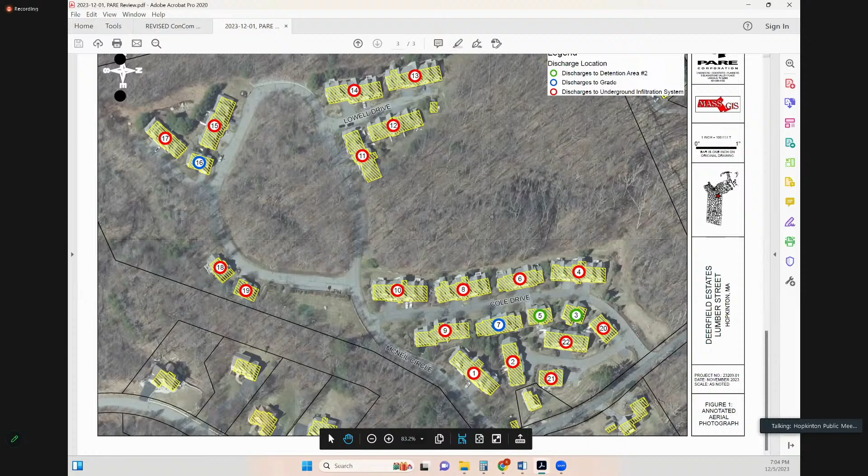Capital Group Properties, Deerfield Estates off Lumber Street - request for certificate of compliance continuation. Kim, if I remember correctly, this project we've been looking at for a while, and where we left off was to ask the peer review consultant to take a look at the stormwater report and confirm what was required for infiltration on this project. Do you want to give an overview of where we're at?

Yeah, I can attempt a quick summary of PARE's findings. They were looking for whether the subsurface infiltration chambers were included in the design to meet standards 2 and 3 under the stormwater checklist, which is peak rate attenuation and recharge requirements. What they found is that minimum standard 2 is met without the units being connected, essentially. They did find that for standard 3, the analysis provided by the applicant required that 63,995 square feet of roof runoff area would need to be connected to infiltration systems for compliance with that standard, the standard for recharge requirements.

The order of conditions that was issued does include special condition number 70, which requires drainage from the roof of each building to be directed to dry wells or infiltration chambers for the purpose of groundwater recharge on the site. It appears the commission at the time was concerned about groundwater recharge because of adjacent vernal pools at this property, and there is a well as part of this development. So the commission had that concern at the time.

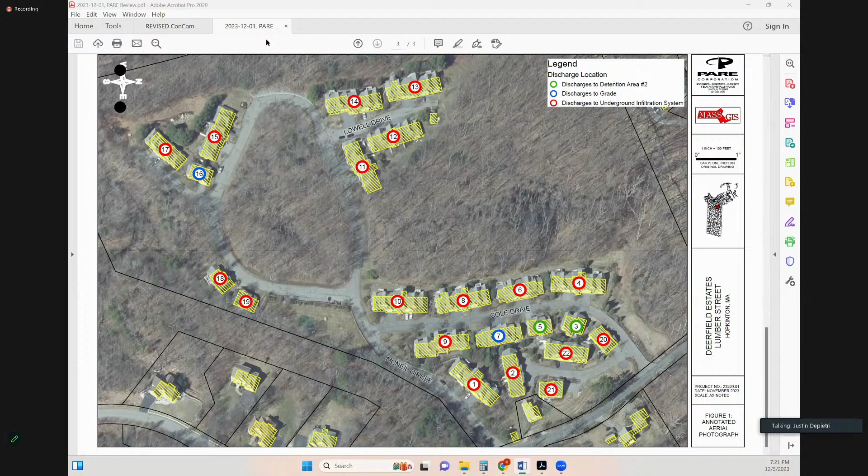Can I ask one more question? We've done a lot of stuff over the last couple of months trying to get this signed off. So I want to be clear, if we have an engineering firm come out and verify that we're meeting these standards on these units, there's not going to be a whole lot more that needs to be done.

Verifying the standards are met on the units and providing an as-built, that's what would close it out. Okay. All right. Thank you.

The Hopkinton Conservation Commission will hold a public hearing on Tuesday, December 5th, 2023 at 7 p.m. virtually online to hear all persons interested in an amended notice of intent filed by Robin Vacha to replace existing retaining walls, location 29 Woody Island Road, Assessor's Map L36, Block 14, Lot 0. This application is subject to the Wetlands Protection Act, Chapter 131, Section 40 as amended of the general laws of Massachusetts and the Wetlands Protection Bylaw of the town of Hopkinton. This legal notice is also posted on the Massachusetts Newspaper Publishers Association website.

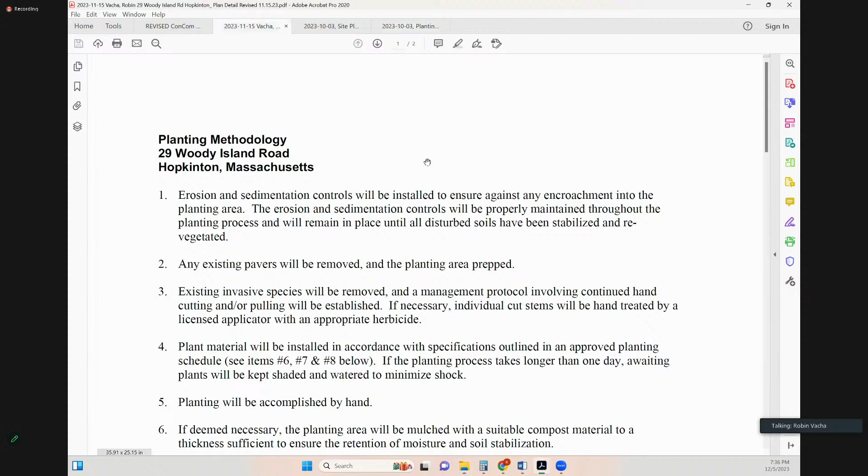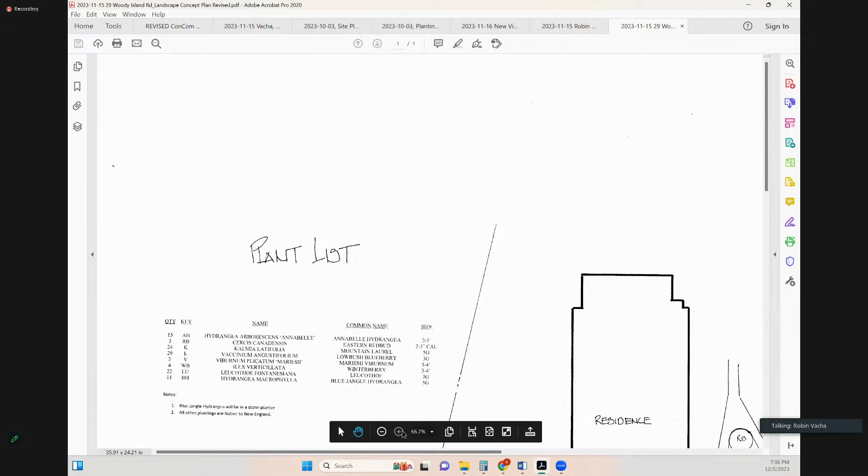Kim, do you have the planting document that Doug gave? No. They're all, I mean, again, we don't plan to change, but they're all clearly defined. He has - I don't know if you have it or not. I think he gave it to Kim. We have a whole, I remember the ones you - there it is, no, there you go. There it is. So you can actually see the plant list up there.

So it looks like there's 15 hybrid hydrangeas, a hybrid viburnum - 3 of those - and then 11 other blue jangle hydrangea hybrids. And then I found this one was actually a non-native - there's 22 of them, it was not native according to Go Botany.

I think Leucothoe is a native New England plant. Might not be that variety, but I think it is though. At least people ask us for it at the nursery, and we do supply that, and that is a native New England Leucothoe. It grows in the woods naturally around here.

The blue jangle hydrangea is not. I put that because it's a very low growing blue hydrangea, and it's going to be planted only in the planter above the patio very close to the house. That's a contained planter, only because I didn't want to obstruct the view inside the house, so I needed something that would stay low in flower for the summer. So I did do that, and I knew that it wasn't part of the list.

Now, the Annabelle hydrangeas, I believe they are native New England. If they're not on the list, they're going to be on the list. That's a native New England plant. Sometimes it takes a while for things to click in. I'm working all over the state, and they tend to accept it, and it's not yet. We have arguments about it.

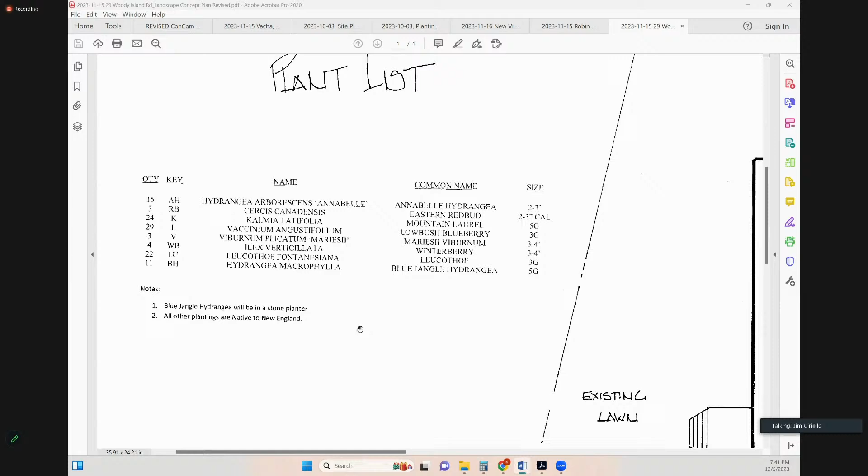So Melissa, yes, our two concerns would be that something not be invasive and that something be hardy and survive. These fit that, right? But we don't know them as invasives, and they're presumably appropriate for our zone, and they've been successful in other places. So that's why I say I'm okay with it, but that's just me.

Seems that way to me too, Jim. I'd say with the way climate's changing too, I wonder what southern plants are going to become more native. Oh stop it, so we'll be planting palm trees and pineapples here someday. Long after, not I'm going that far. But yeah, I think the survivability and not having to water them, using a lot of water obviously wasn't a problem this summer, but that's a good point too.

Other years we don't want high intense water use plants. But that being said, the hybrids, I think they would have a lot of the characteristics of the natives if they're hybrid. They'd probably inherit those, and that's why they're sold up here. So I think I'm okay. There's a lot of plants, and I appreciate the number of plantings. I think it could give a little flexibility there, in my opinion.

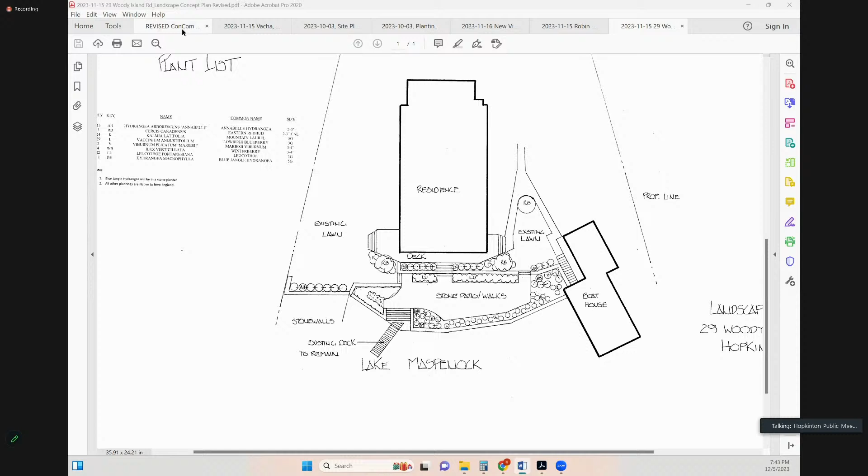Okay, are there any questions or comments from the audience? Or from the public, I guess I should say. I don't see any hands. Through the chair, this is Joe.

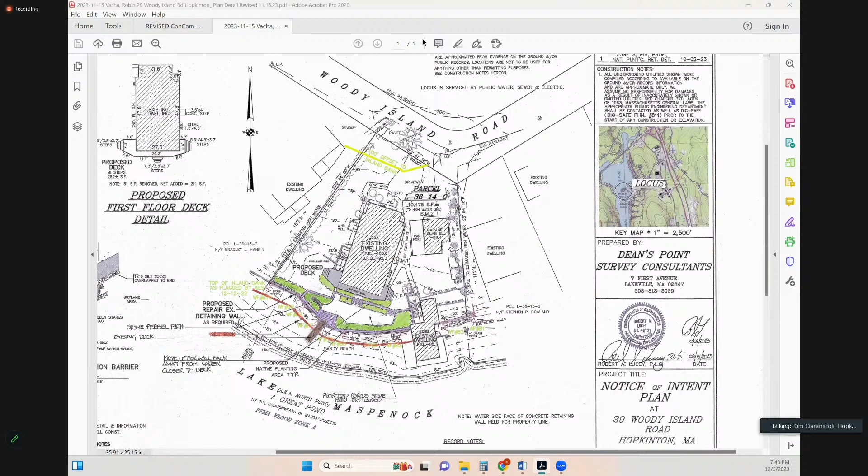Okay, so I think we covered all the bases here. So what we are asking for before we vote would be making the changes in regards to swapping out the straw wattles for filter mitt or something similar. And then applying some sort of stabilizer to the open soils over the winter, whether that's a blanket or straw or something to that effect.

And then, do we have a condition? This is going to be done during dry or during drawdown, the work on the wall, correct? That could be a condition. And it's on the applicant should verify compliance with the Mass Waterways Chapter 91 program and permit requirements for the wall itself. Okay.

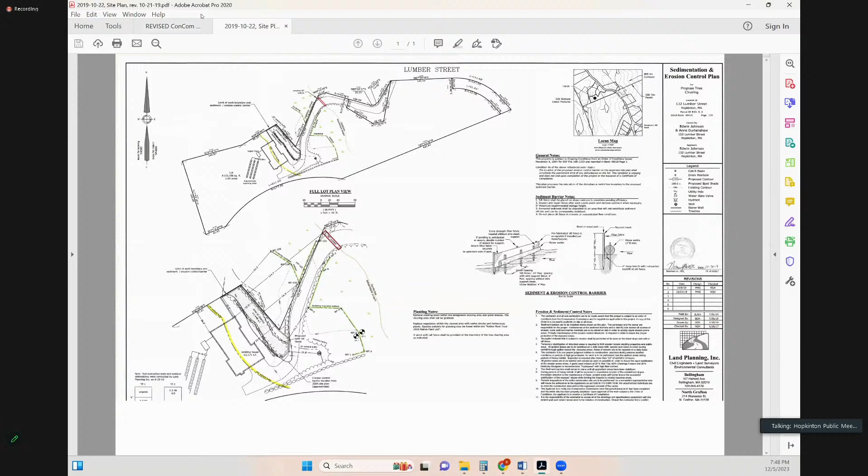All right, so our next two hearings on the agenda were continued to December 19th. All right, so that leaves the work session items.

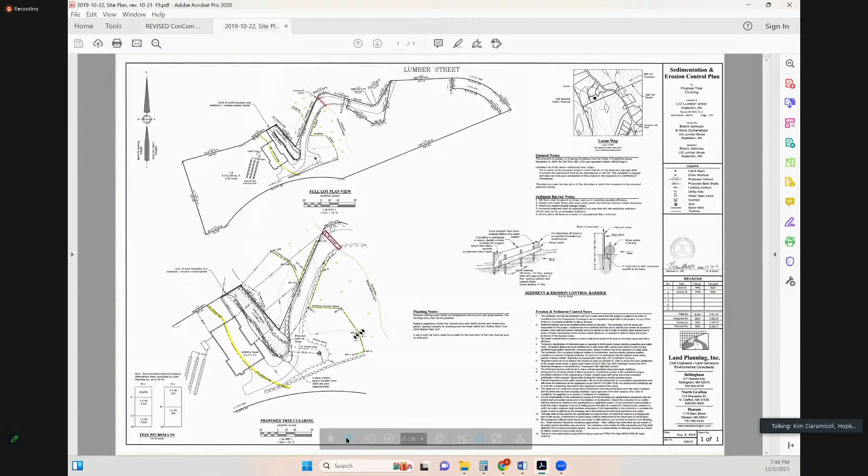So we'll go with Johnson, 132 Lumber Street, request for a 1 year extension. Yeah, I can run us through this one, hopefully quickly.

Here are some site plans to look at. So this is a request for a 1 year extension. There was a 2019 order of conditions for removal of vegetation within the buffer zone. The applicant removed the permitted vegetation and has allowed the cleared area to revegetate naturally. And I went out and inspected the area in October.

We did find that the area is stable, but does have some invasive species present. I recommended that before the applicant apply for the COC, the invasives be managed, and we do another inspection to evaluate the health of the vegetation. Because of the timing of the year, a one year extension of the permit is necessary in order to finish the work. So that's what I'm recommending to the commission tonight. And I will work with the homeowner in the spring to manage the invasive species. Luckily, I think it's just a hand pulling situation, so hopefully we can get the COC going early in the spring.

Okay, seems reasonable, makes sense to me. Does anyone have any questions, comments on this? No. Nope. Okay.

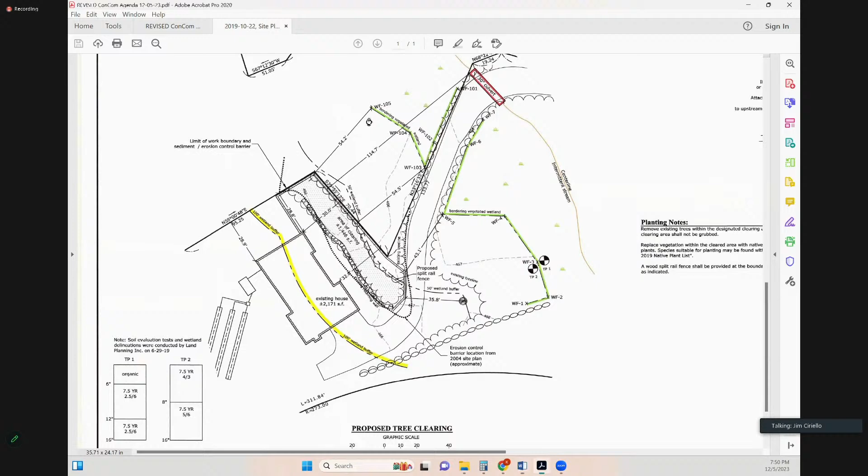Do we need to sign on this too, or just make a motion, Kim? Just make a motion. Can I get a motion for a 1 year extension on this 132 Lumber Street project? So moved, Ed so moved. I heard Jim move, I'll second. Jim seconds.

All in favor? Ted, aye. Jim, aye. Ed, aye. And I am an aye. All right, thank you folks. All set there. Next we have a continuance here for Grasshopper Energy.

And then we have 0 Equestrian Drive, or a request from Benny Mac, 21 Appaloosa Circle, to remove down trees and commission-owned open space.

Through the chair, yes, I can run us through this. I was expecting the homeowner on the call tonight. Is anybody in the waiting room, Melissa, or are we clear? I don't see anyone else asking. Is there like a waiting room button?

I have no idea, one would hope it would pop up if there was somebody. I've been seeing them pop up and allowing anyone to come in as they pop up, so I don't see any.

All right, so this is a request by a homeowner. A tree fell down naturally. Mr. Benny Mac lives in this lot here. This is the original subdivision plan, so it's the lot with his house. Behind his house is a Cultec unit leaching area, which accepts drainage runoff from the rest of the subdivision. And then behind that is open space, which is actually owned by Conservation Commission in this case.

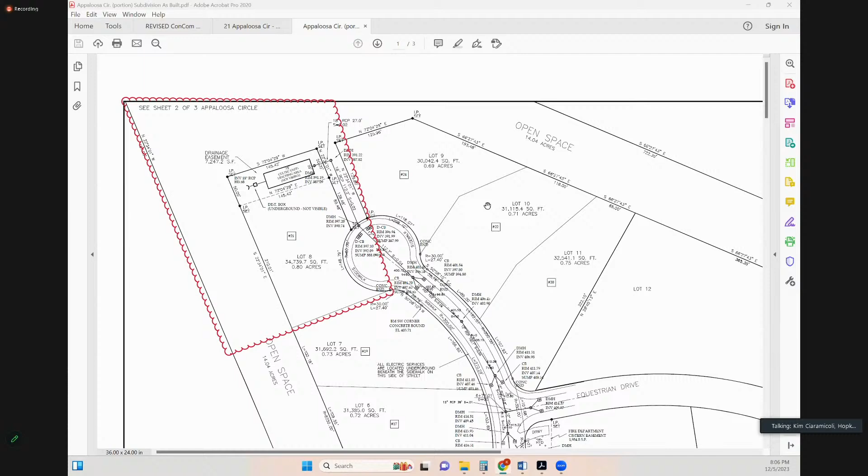Next we have Maspenock Woods LLC, West Elm Street, Maspenock Woods condos, request for certificate of compliance. This is a continuation. What do we have here, Kim?

I actually have not heard from them since the last meeting. I sent an email and didn't hear back. I'm wondering if anybody is on the line, because I didn't get any other updates either. Hi, I'm online, this is Amanda with Guerriere and Halnon. For this item, we're working with the wetland scientist, so we'd like to continue this to the next hearing if possible, and we'll reach out to the wetland scientist and coordinate with Kim. The next meeting is December 19th. That works for now. Okay, thank you.

All right, and next we have Trolio, 100 Ash Street, request for certificate of compliance.

I'm also on for that one as well. You are? Okay.

Can you give an update? Sure. So we submitted the request for certificate of compliance back in October. It's a single family house lot that the applicant has recently purchased. When the application was filed, it was in the process of being transferred between owners, and there was an outstanding order of conditions on the property that needed to be closed out. It's since expired. The old one was from 1996, so it's an old order.

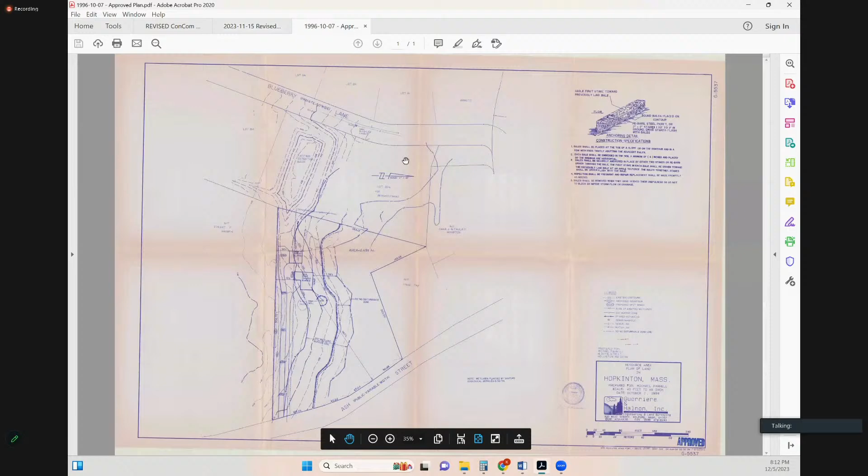Looks like, is this the approved plan, Kim? Yeah, so this is the approved plan. It's an oldie, so not super detailed, but here's the driveway, the wetlands over here, the house, and then the garage. And here's the as-built. So there is this expansion, this foundation, and I think the actual garage footprint is a little bigger as well.

The garage is already built there. It's already up, I'm not sure. Just want to make sure everybody's clear about that.

Can you provide your name and address for the record? Thank you. Oh, this is Marcello, the homeowner. Okay, I just want to make it clear that the garage is already built. It's already, except for the roof structure, everything is already there. So before I bought the house.

And that's all. So even on the approved plan, Kim, was that within the disturbed area and grading? Yeah, yeah.

I would say the additional foundation was within the area that was already being graded and maintained as a lawn. I don't know at what point in time that took place. I think this property was overgrown for a while, so I don't think anybody had seen it in a long time.

I'm just filing a permit to put the roof structure back on, just to clarify. I know that probably has nothing to do with what we're talking about, but I want to make that clear as far as the state of things.

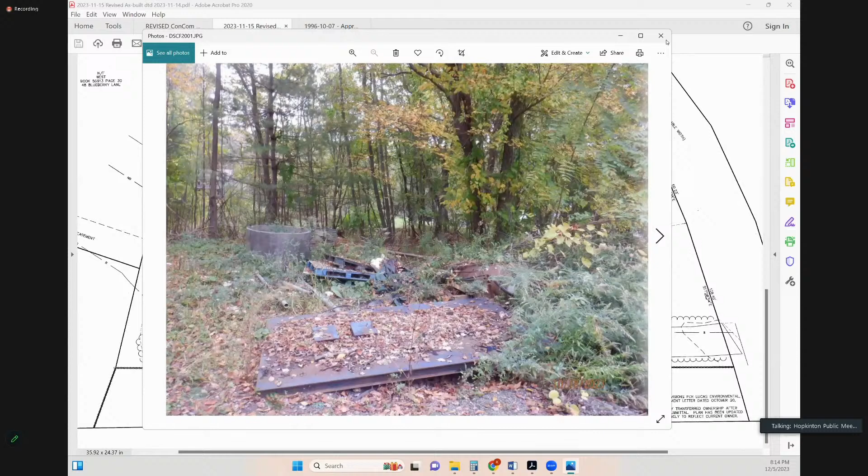Melissa, can I? Yes, go ahead, Jim. I assume the applicant understands that there was an order of conditions, a plan to build a house, and then someone along the way ignored that, and their attorneys ignored the fact that there was this encumbrance, but they ignored it and built anyway. I know you're just here for the roofing, but we have to get over the fact that this was all built without any permit from us.

I'm not sure about what happened in the past. I don't know, I'd have to ask Amanda about that, but yeah, I don't know.

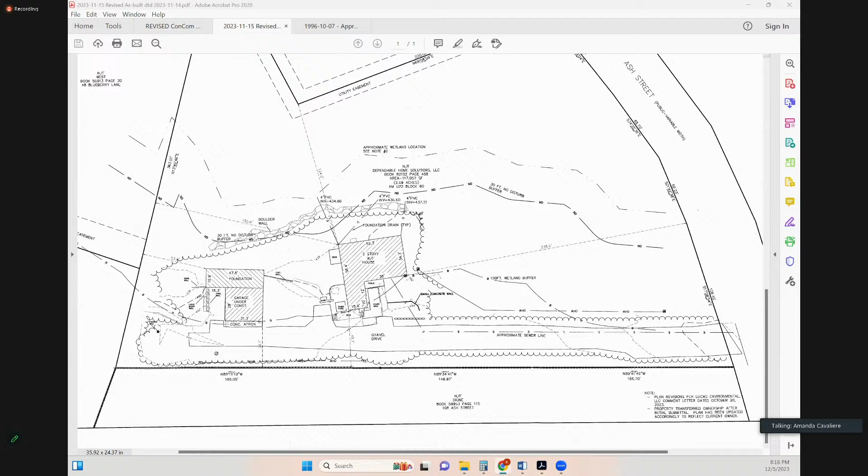If I may, through the chair: this site was previously constructed. One of the items under the order of conditions to close it out was to provide an as-built of what was constructed. The applicant is aware, and we've had conversations that any future work on this property would require a new filing for any work within the buffer zone if needed. The garage is already partially constructed, so any building permit required to put the roof on has no impact to land disturbance. As far as the foundation in the back...

Again, this was all constructed prior to Marcello owning the property, and as Kim mentioned, it's within the area that was proposed to be disturbed. We can certainly work with the applicant moving forward should they propose additional work on the site, as far as a new notice of intent being filed. But at this point there's no further disturbance. A lot of the time with expired orders of conditions and transfers of property, we provide an as-built showing the commission what is here, so that future disturbance beyond what's on the property, rather than encumbering the applicant who currently owns the property and wasn't part of the previous disturbance, they wouldn't necessarily be responsible for filing for an order on work already done, but anything moving forward would need to be in substantial compliance with what was proposed, minus the foundation.

I'm not sure what you mean by 'minus the foundation.' The foundation is the part I don't understand.

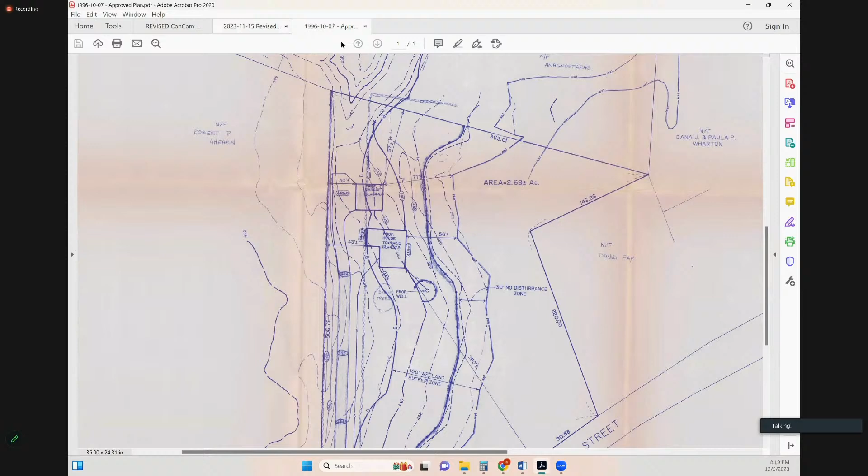Melissa, could I bring up one other thing that Ellie mentioned? Sure. About the roof drains into or near the wetland. Was that originally approved, or is that something added that you're hoping we'll approve now? I don't feel like that's our normal practice these days. Maybe it was whenever these old blueprints were approved. It does not appear that they were proposed.

Again, this is prior to my time and what was constructed prior to the current owner. So the purpose of filing on an expired order would really be to show the current conditions as they exist today with the current owner, and any further work done on the property within the buffer zone would require a filing.

So it looks like these are foundation drains, which are a little different than roof drains. Do the roof drains for the house and the garage go to the surface, like just splash to the ground surface? I believe there's one foundation drain and the other two... actually, they all appear to be foundation drains.

I'm sorry, maybe I don't understand. I think the comment I see in your response is the pipes in the field are roof drains. So they... yeah, those must be the roof drains, if I remember correctly, when the engineer went out to the site to inspect. So those would be the roof drains.

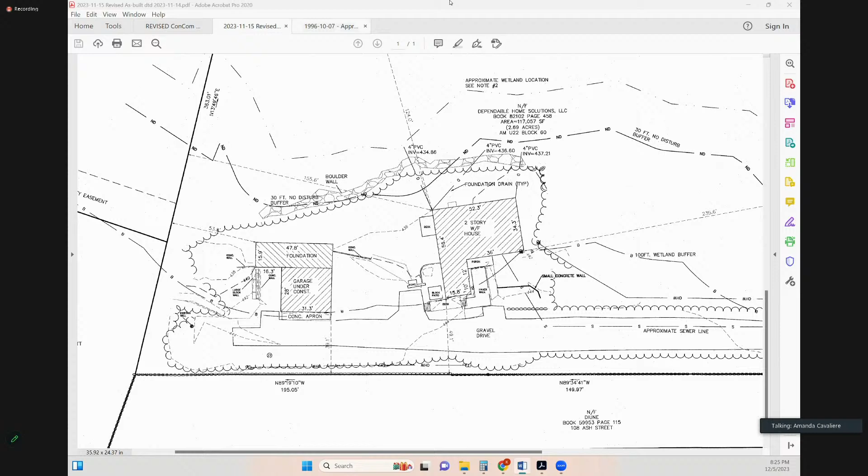All right, next we have DeLeo, 44 Stony Brook Road, request for certificate of compliance. Do we have anyone on the call for this property? Yes, Dave Marquedant, for Paul DeLeo. Hey Dave. Hi, how are you?

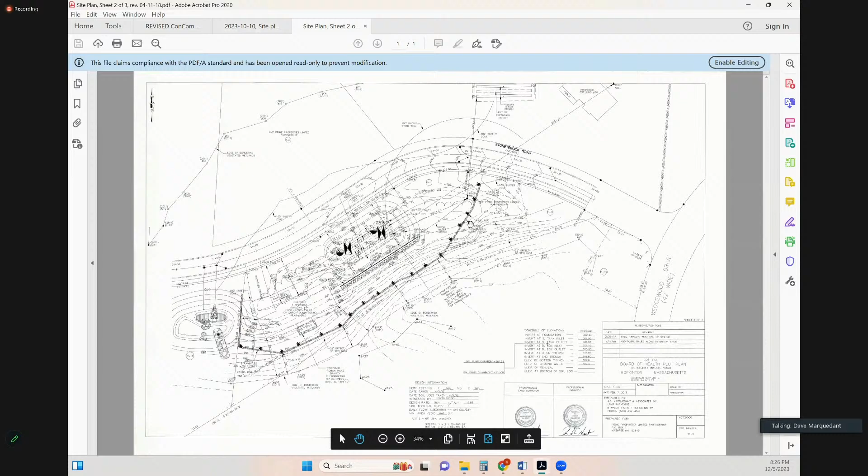Good. So this property was permitted back in '18 by Prime Properties. Paul DeLeo bought it from Prime. I think this board and staff has seen a lot of project changes in discussions with this project from its original design. As it currently sits, the house is where it's supposed to be per project change. Septic and well are very close to where they're supposed to be.

The retaining wall behind the septic has been shown just a little bit towards the road right there. That retaining wall has been shown up in different locations over the last couple of years. It's where it's supposed to be. And then I think this board saw a project change from the septic tank and pump chamber that was in the front yard, which was moved to the backyard.

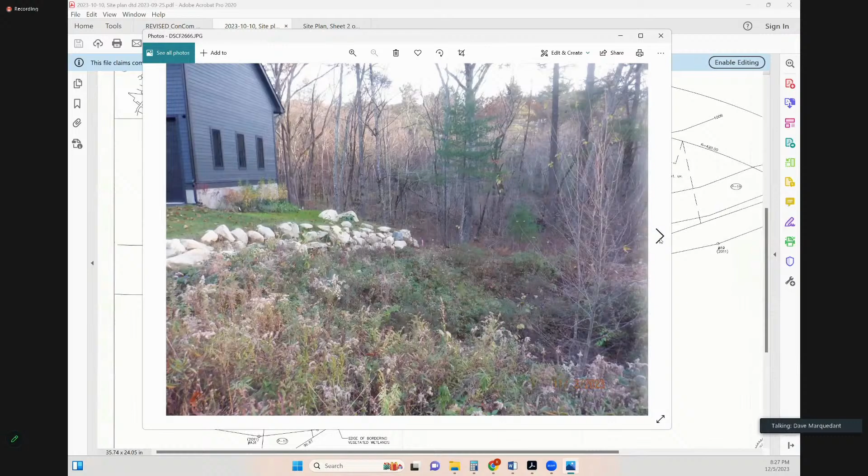There were plantings, patios, chain link fences behind the home, small retaining walls behind the home, and a riprap slope that's acting as our PIB in the back of the property adjacent to the wetlands. Everything appears to be very stable. Everything's green, plantings, trees.

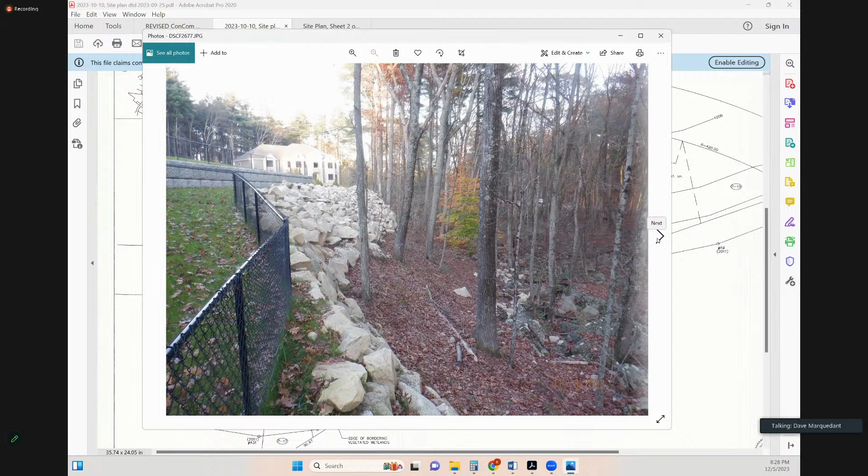Erosion control measures have been removed. You can see the plantings in lawn. There's the limit of work, there's the PIB, and the riprap slope—very large stones that appear to be locked in place and not moving. The limit of work is all more than 25 feet from the wetland, except for one little spot at about 24 and a half. But all else is fine.

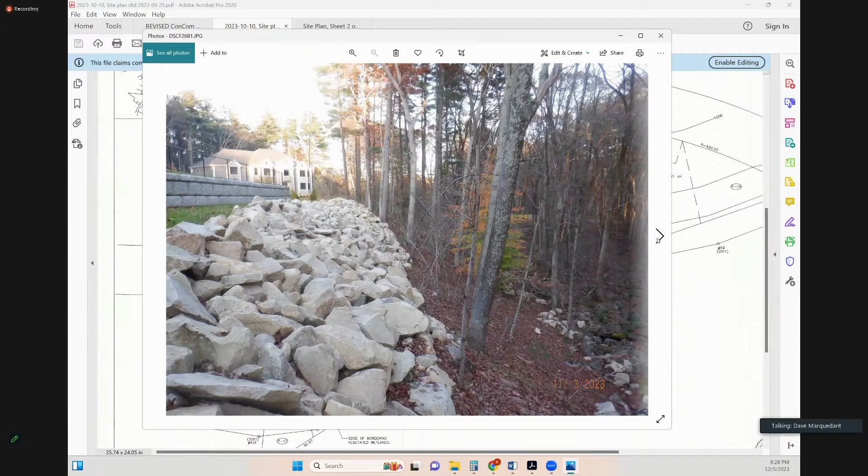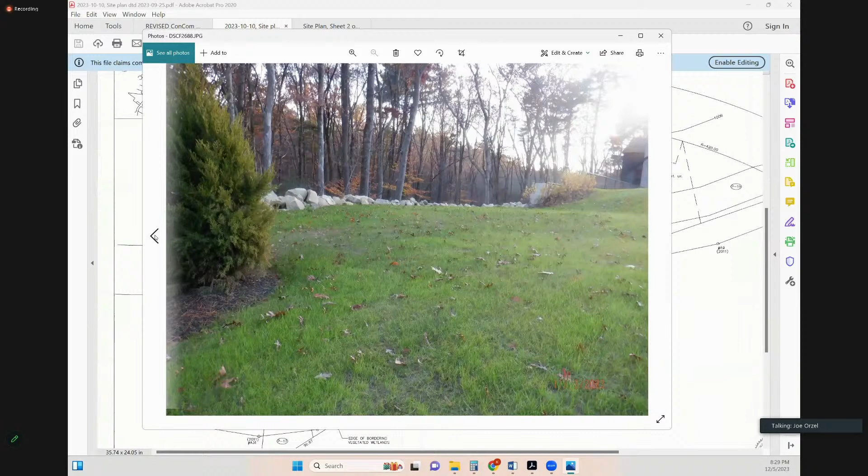Thank you. Joe, Kim, do you have any comments on this request? Yeah, I did go out on the site and I'm pretty much in agreement with what was just said. The site is generally well stabilized. A few areas had some thin grass, but it's coming in well. The erosion control barrier had been removed, and no erosion issues were noted. Other than the rock slope being slightly beyond the approved limit of work, as was stated, no other disturbance was noted beyond the limit of work.

And again, the rock riprap wall does function as a PIB. One question I had was that the most current approved plan I had seen in the file included a small area labeled as a stone lined slope, referencing the detail. However, the detail included on the plan showed a vertical block wall. I'm not sure what was discussed at some of those previous project change meetings, but I thought the commission might want to discuss whether the constructed rock boulder slope was consistent with what was previously approved, as far as if it was in fact a vertical block wall. Other than that, that was all I had for comments.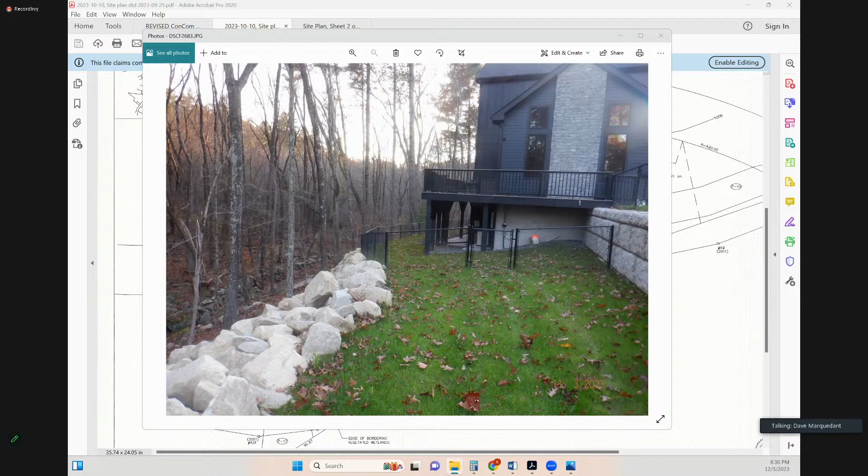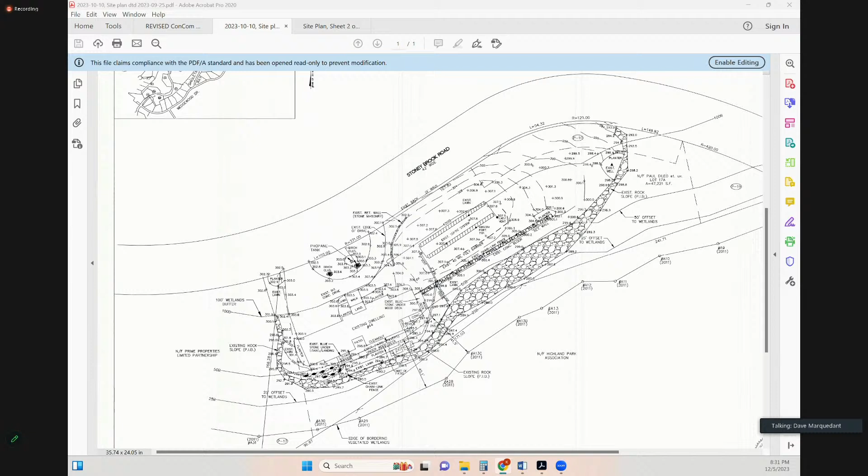Okay, Dave, do you have any clarification on the wall? Yeah, so I think that detail is related to a slope that's right below, between the septic tank and pump chamber and the wetland in the back of the home. There's been a lot of discussion with the Board of Health as to whether you call it a wall or a slope. The Board of Health is comfortable and has signed off on an interlocking slope versus a retaining wall, and that's what was constructed. The detail has always been a little bit of a concern with the Board of Health, that it was shown as such, but that's not what was intended to be built. What they built was what the Board of Health was hoping to have constructed, so the Board of Health was happy with it. There was always a little vagueness as to why it was drawn as a wall in that area. The area we're talking about is right there, right below that spot, between that spot and the wetland, right there.

Okay. Yeah, I think I would defer to the Board of Health on that, with the septic right next to it.

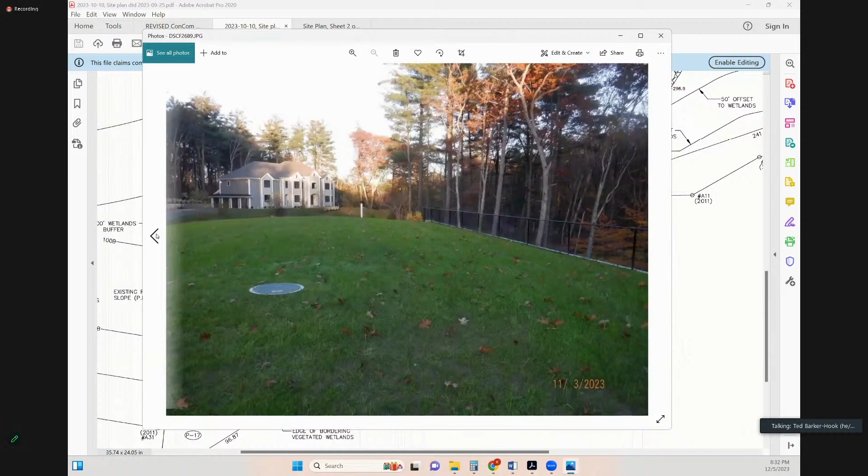Any other comments, questions? I have a quick one. Kim, could you show us that photo that shows the back patio, the riprap wall, and the chain link fence—the one that was up right before you put the plan back up? There. Dave, just out of curiosity, what's the distance between the pylons holding up the deck and the back edge of the chain link? Maybe 10 feet or less? I don't have the piers on there, just a guesstimate, but I have the limit of deck to the fence—deck to fence is 10 feet. And then if we look at that rock wall to the riprap, that might be 20, 25 feet.

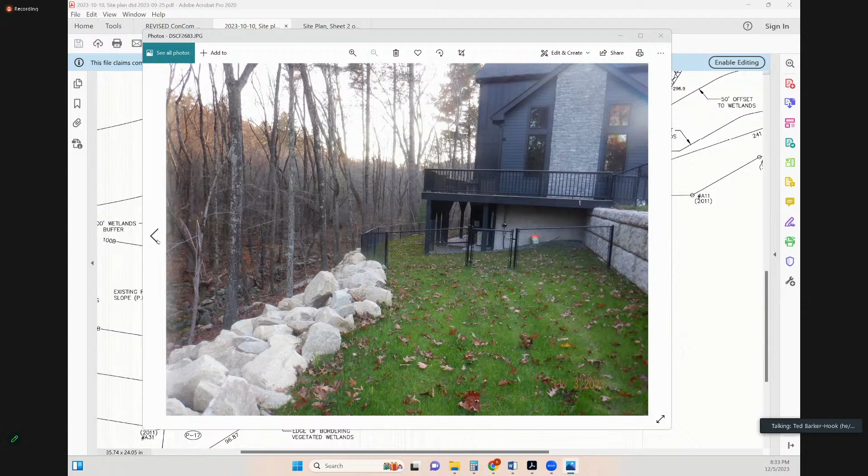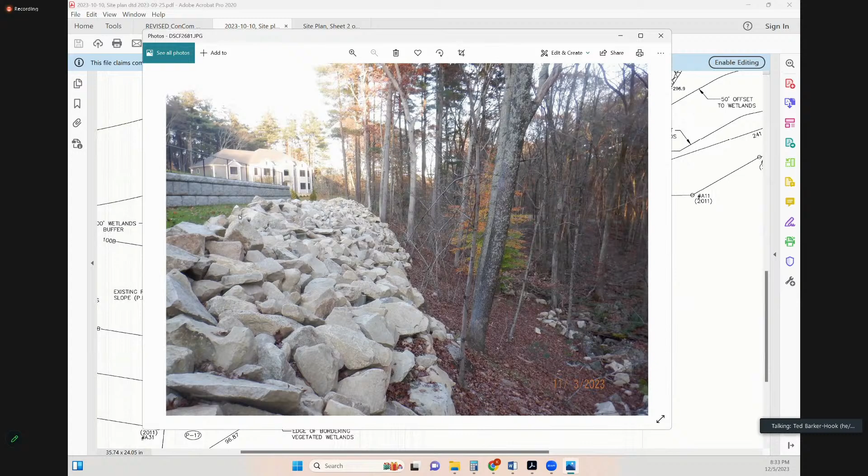I bring this up not for this property, but just for commission members to keep in mind when we have developments asking for 40 or 50 foot backyards so the home can fairly have a backyard. Here's an example where I bet the homeowners are happy, or they wouldn't have bought the home, and we have a backyard much smaller than developers tell us they must have in order to sell their houses and make money. I think this is a really good example of what can be enforced while developers can still make money. It's mostly a comment for commission members to file away, because I often push back on backyard size, and this is the kind of thing that I know gets built and gets sold. So maybe it's a standard we can continue to try to hold developers to. That's my only comment.

Should we create an all-star board? I would put this on the all-star board.

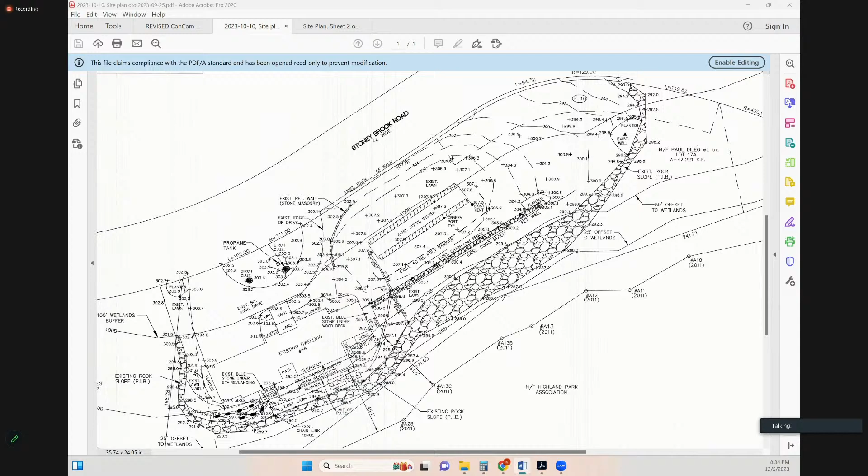Can I get a motion to approve the certificate of compliance for 44 Stoney Brook? Ted will make that motion for the all-star backyard. Can I get a second? Jim will second it. All right, and I'll say something after we vote. All in favor, Ted? Ted is an aye. Jim? Aye. Ed? Aye. And I am an aye.

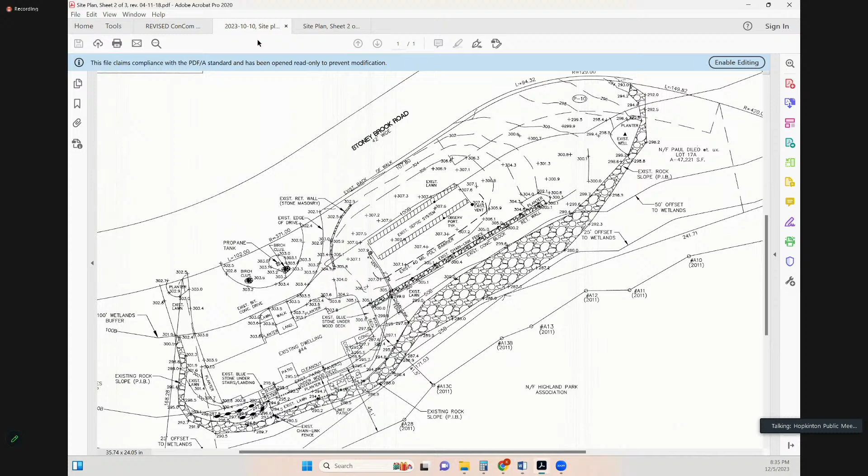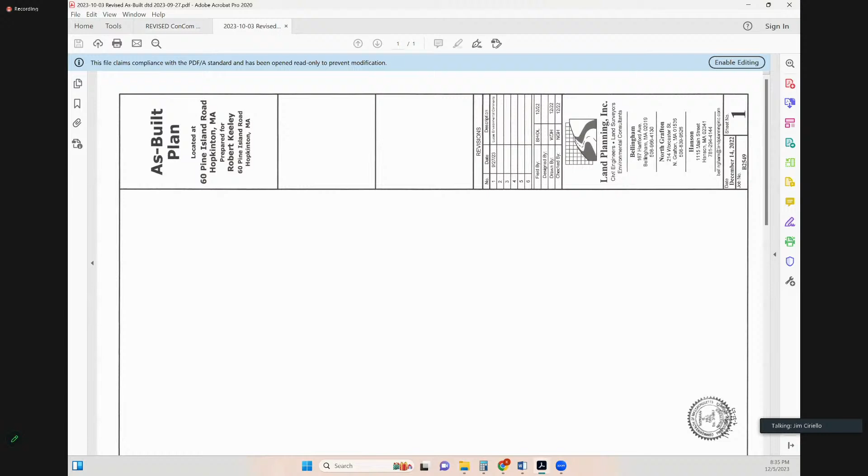All right, know what I was going to say? Yes, I do. Excellent. I'm all for the idea of an all-star board. I love that idea, but I also think we ought to have the flip side of it, which is the oldest applicant requesting a COC. The last one we heard was 1996, I think, right? So I don't know if that sets the record, if we've seen any before then, but let's have the all-star board and let's also put up the longest period of time before somebody asks for a COC. Through the chair, somebody was asking me about file number 11 last week, so they may get beat pretty soon. Wow, well at least 1 through 10 are done. Maybe.

All right, number 10. Speaking of number 10, now I have Keeley, 60 Pine Island Road, request for certificate of compliance. Do we have anyone on the call for this property? Yes, Bob Keeley. Mr. Keeley, can you welcome? Can you give a little overview of your project?

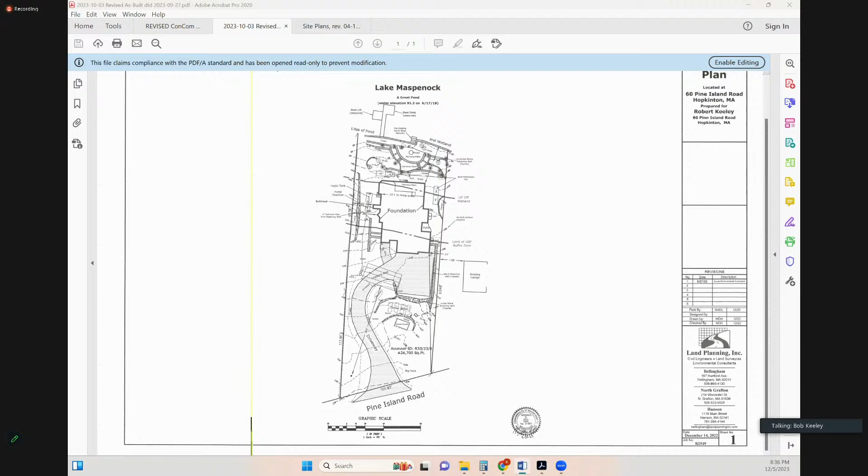Sure, so we bought the property in 2019. There was, you can see on the left, a cabin that was built circa 1900 on the site, and we removed it and built a new house. We had to relocate the well, it's not in the wetland area. There was a failed cesspool in the wetland area that we removed and put in a 2-tank septic system and pumps to pump the water up the hill to leach under the driveway. It was very, very steep. The runoff was going straight from the street down the old driveway you can see on the left into the lake, and we've terraced and graded it, and we love it.

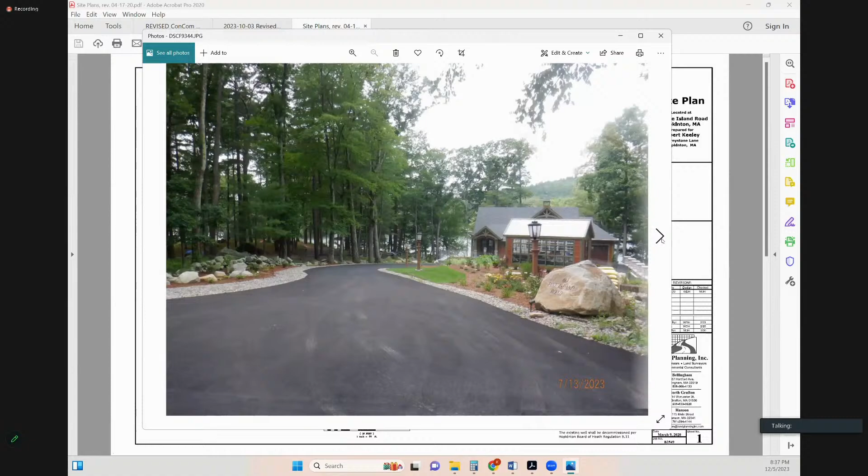All right, so Joe, did you take a look at this property? Yeah, I did.

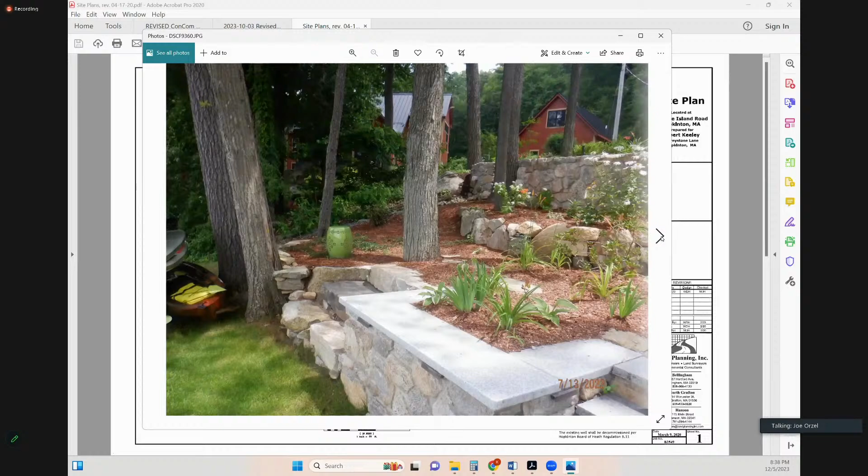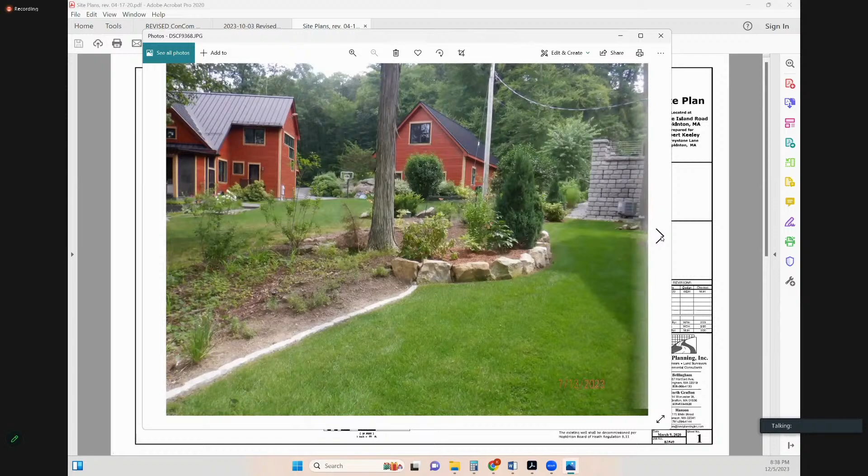So the site is well stabilized. No erosion issues were observed. The erosion control barrier had been removed. One of the pervious patio areas appears to extend closer to the lake than the approved limit of work. In addition, the as-built plan shows apparent steps located from the bank, the retaining wall to the lake, that were not on the approved plan, as well as the fire pit, which is within the pervious patio closest to the lake, which was not on the approved plan.

Also, the approved dock and the boat lift were not included on the as-built. Recommend that those be added. There's also a 4-inch PVC pipe outlet present in the area south of the septic system, and the source of that was not apparent and it's not indicated on the as-built. So recommend that be added and the source be determined.

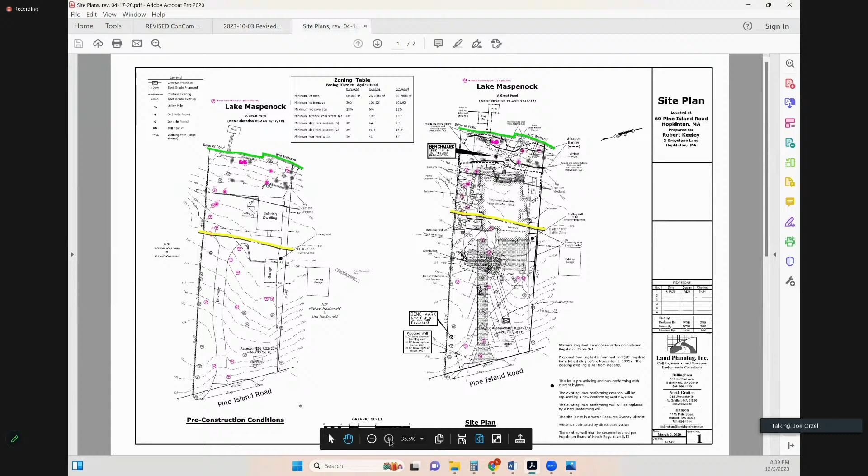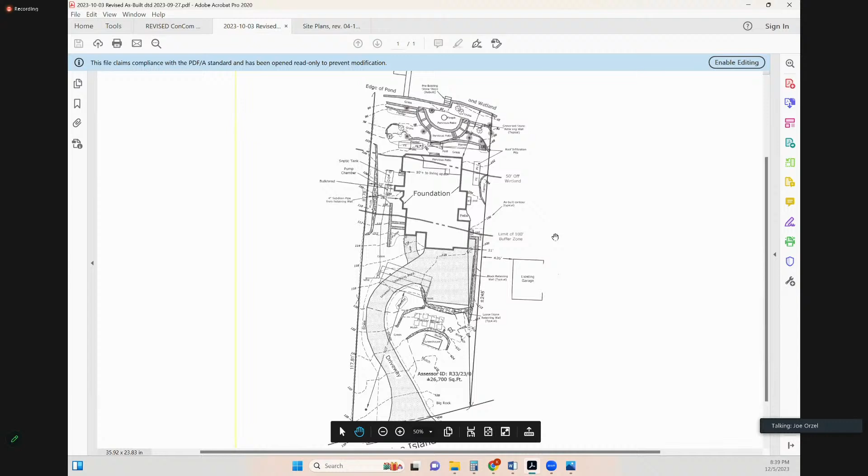The approved plan indicated that the retaining walls were not to be higher than 3.5 feet. There's at least one that is greater than 4 feet in height. Recommend that the applicant provide information that the wall was appropriately approved by an engineer. No PIBs or markers are indicated on the as-built plan; it was not clear if any were required. Just a couple of minor items: the fee calculation form was not included in the materials reviewed. I do note that the Chapter 91 license was obtained for the approved dock and boat lift. And there were a couple of ongoing special conditions as is typical, but that was it for my comments.

Okay. Mr. Keeley, do you have any clarification or comment? Yeah, so I apologize if you don't have it. So land planning submitted back in September responses to LE's observations. That wasn't provided to you guys? I got it, yep. Oh good. Yeah, okay, so I can respond to the items. Is that helpful? I don't, it is just a high level. Yeah, sure.

So the pervious patio, the area when we were constructing the walls was disturbed. Rather than putting grass in, we had to put the same pervious patio that we put up by the house in. It's stable, it manages the erosion, there's no runoff. As far as the, what's the other one?

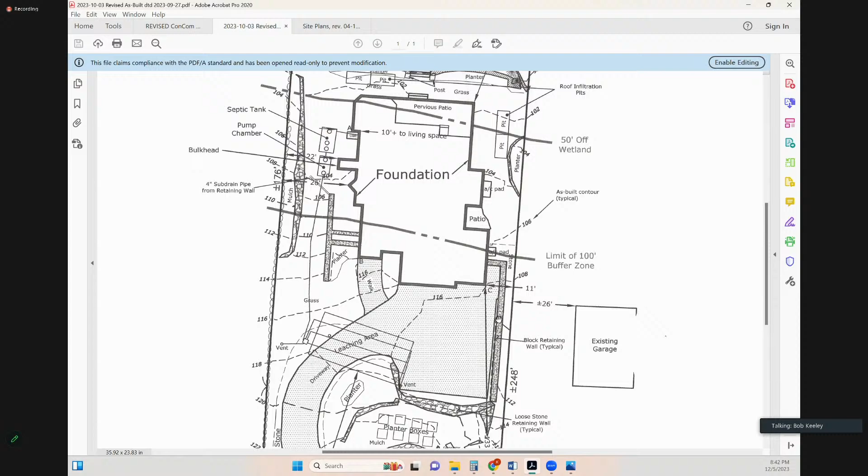When we set the wall height, we didn't know how high the grade was. We were working out the grades after we started the project, and there was no way to get the steps from the lake up to the house without constructing higher walls. Our stonemason says he constructed it per the plan on the site plan. There was what was submitted, a graphic describing how the wall was to be constructed.

We don't have any engineering plans. I wasn't aware I needed to do that. And I think that was all of the items.

Okay, it looks like a lot of them are identified in this plan, the subdrain. I see the dock. Over 4 feet is a building standard for walls, right, Kim? Yeah, so I understand that's the trigger for needing a permit from building.

I would recommend it just because we did just have a wall fail in town quite spectacularly. So it's more for your protection than anything else.

Okay, I did have a question, Melissa, if you would entertain me. I was wondering, Mr. Keeley and/or the engineer, was it -- and this is just me looking with my naked eye -- it does look like the driveway, the total footprint of the driveway over the proposed, is a little bit larger. Is that what I'm seeing?

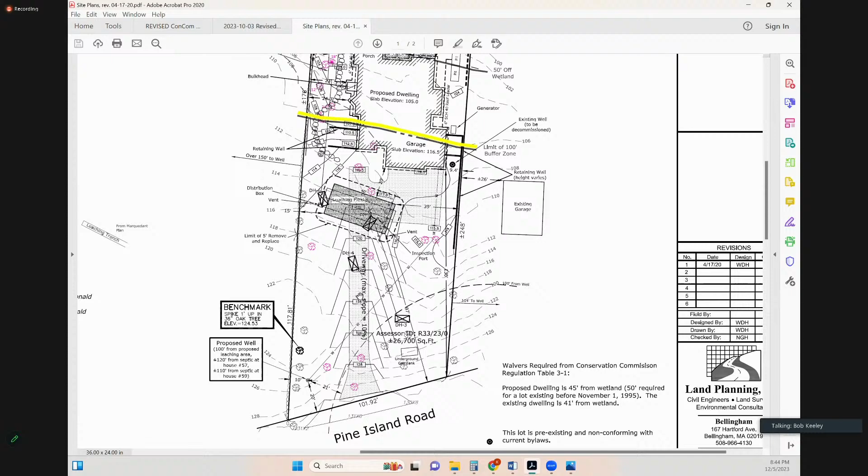So we had 2 plans. One was the straight plan like this, and the other one had the curve in it. And we went back and forth with the fire department. Yeah, because if you go back to the other one, it has the S curve in it. So the fire department and the building department approved this plan as part of the project to keep it from just being a straight shot down.

We were trying to get more or less grade as you were going down the hill because it's so steep. So the swoop to the left was added, and we had to put stone on either side of the driveway to meet the fire department's requirement in case a vehicle needed to get down there.

I guess my question to you and to the commission is, does the commission have an interest in having that information provided? Is there an increase of impervious surface over the proposed? And if so, can that increase be infiltrated on the site? I'm thinking about quality of runoff. Definitely a steep grade here.

I think it would be worth providing those numbers just so we have an understanding of the magnitude of a change.

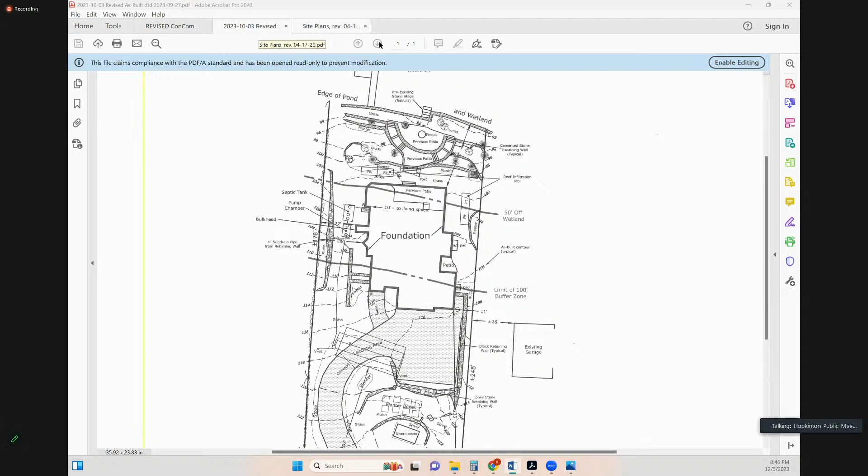Kind of along those lines, there was the comment about so pervious patio extends closer to the lake than approved limit of work. How much closer is that? What was the difference there? I don't know if that's a number we have now or something we want to ask for.

So is this the limit of work on this plan? It looks like it. Right.

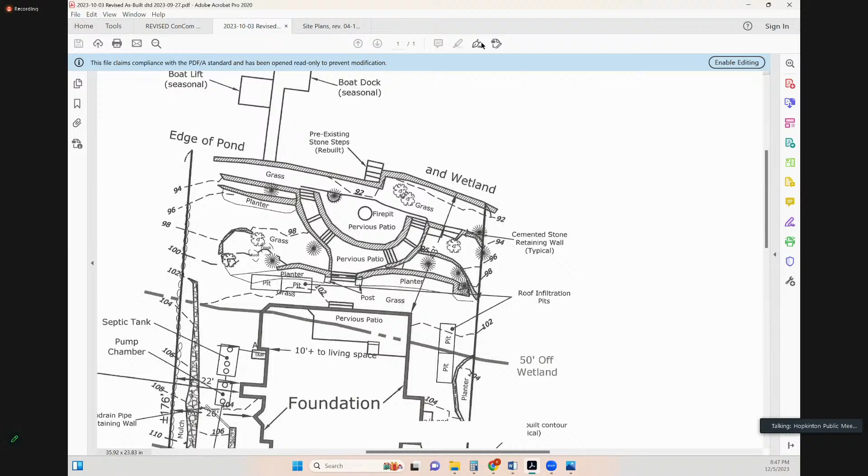And I think the pervious patio is here. Yes. So I guess the question becomes, what is the separation? I mean, I know that this area in between is like a grass lawn area as well. And grass is what we had on the approved.

I guess it doesn't really say. No, I'm looking for if there was original photos from the original filing. I'm not seeing any in the file. Oh, wait.

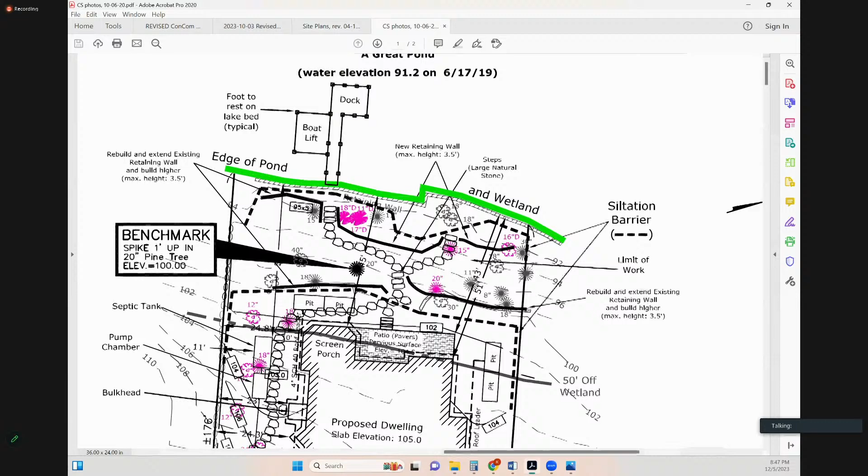So it does look like the existing condition was a grassed area. It's just a lot greener grass now. Okay.

Was the patio on the approved plan? No. There's a patio up here, but not in this location. I think these are additional masonry walls as well, and then the steps, the patio. This patio exists as well. So the stepwise retaining wall improvements, masonry walls, and pervious patios down here seem to be additions. Yeah, it's a little different.

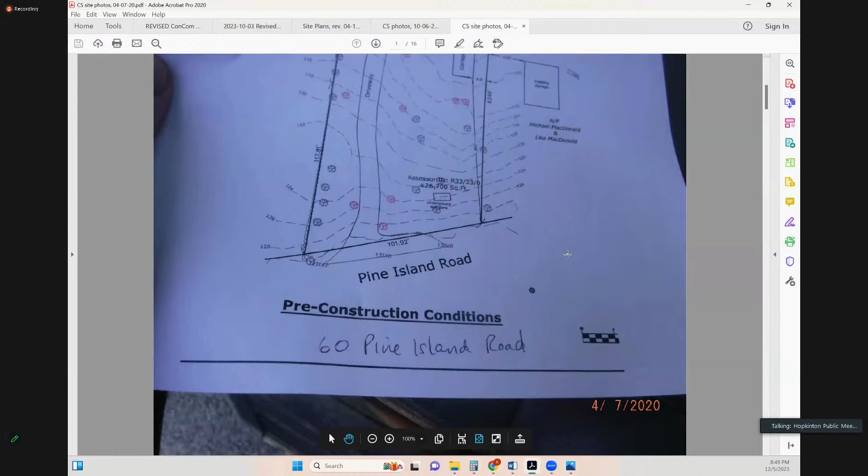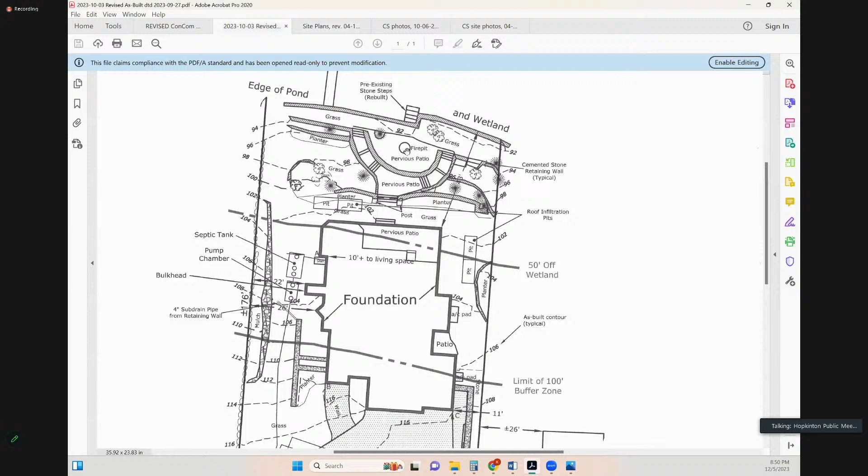So it sounds like we'd like to just understand the difference in the impervious area associated with the driveway, and then a little more clarification on the distance, the change extending closer to the lake, what that measurement is.

Does anyone else have any other comments on things they'd suggest for this as-built, or understanding in order to potentially close out this order?

Melissa: I don't think I have another question, but I think that if we see that the patio and fire pit and walls are closer to the lake edge than we approved, a possible thought, if we find that's true, is to turn the grass area into plantings, as we've been asking people who live on the lake to do. We've done the boat tours, and it seems to me the more grass we see on the edge of the lake, the more weeds we see in that part of the lake. So if there is an issue there, that may be a way to take care of that problem a bit.

But we have to wait to see what kind of issue there is. No, that makes sense. It makes sense to me. We get an idea of the variation. That makes sense, Mr. Keeley.

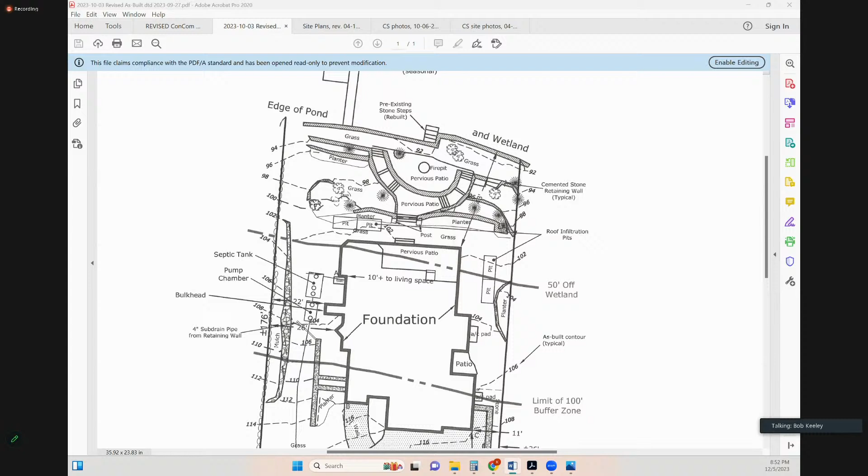Yeah, so I need to get you the calculation for the driveway, the dimensions of the patio area, and I'm unclear about the permit for the wall height. What's the ask? I just want to make sure I don't waste your time coming back and not having something I'm supposed to have.

I think that's more of a recommendation, to either provide a design from the builder - we're not retaining wall designers. Providing that plan to us, we're not gonna have comment. We just, like Kim said, have seen walls fail, so we just want to make sure that doesn't happen and cause erosion issues or safety concerns right there in our jurisdiction. So if you could get some backup for the building and design of that wall, potentially even a permit from the building department, that would definitely check that box for us.

Okay, I'll reach out to them. I feel kind of dumb not having got it the first time, but now that it's done, I will reach out. Okay, through the chair.

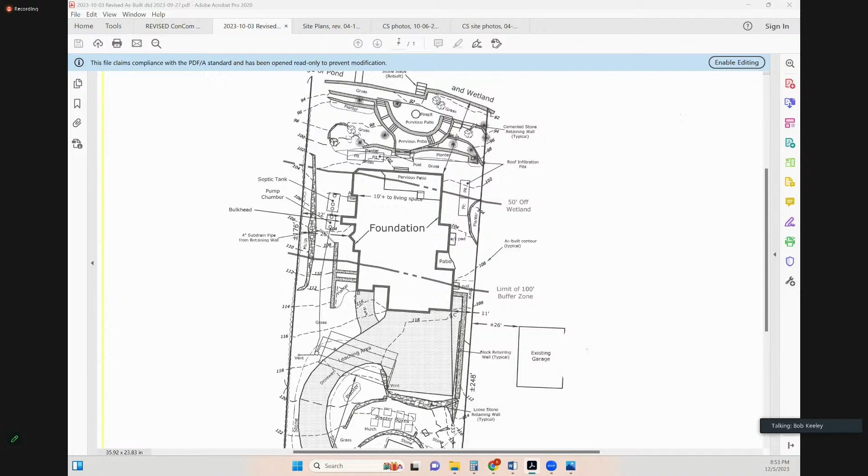Yes, just clarification on the driveway. I think what I was looking for personally is a calculation of the total impervious square feet in the proposed versus the as-built. So that would include roof runoff, driveway, anything else that's impervious at the site. Okay, so we can get a whole picture. Mm-hmm. Yep.

Okay, so I think we'll continue that one to the next hearing, December 19th. Does that give you enough time to collect that information, or if it doesn't, you can always...

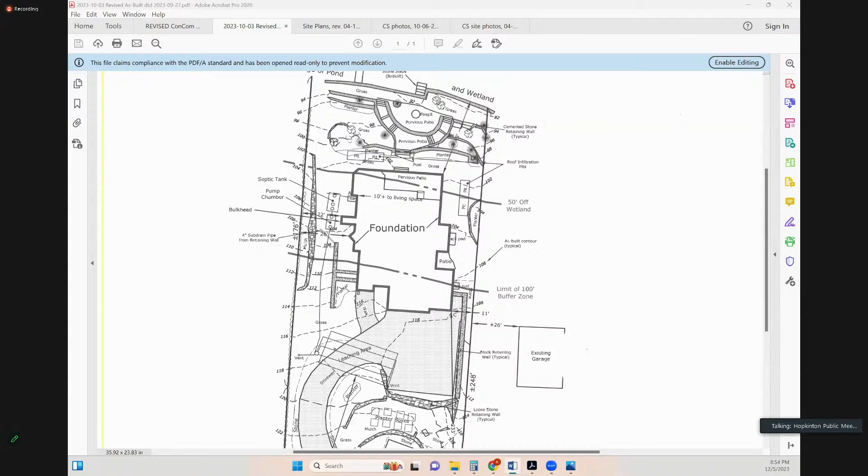The measurements, it should be able to. Okay. I do know when we did the driveway, there was a discussion with the engineer, making sure we weren't over any limit of impervious surface on the site. So that was a discussion point. I don't know what the numbers were, but I recall it was discussed. And he said you got plenty of room, you're not in danger of running over. But I'll get the difference for you and any backup for that anyway.

Okay, appreciate that. Okay. All right, so I think we're all set on this one. Great. Thank you. Thank you all. Appreciate it. All right. Am I the last one for you?